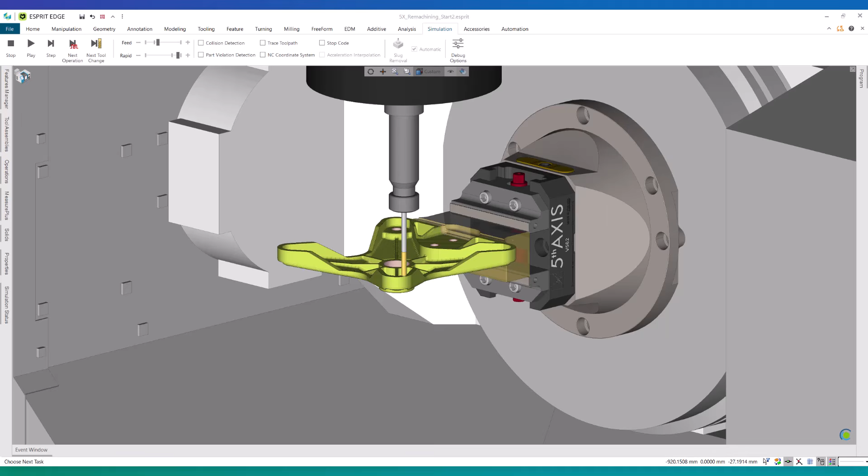Let's take a look. The bulk of the machining is already complete, and all the features are set up, including the freeform features we'll use for remachining. Freeform features let ESPRIT work directly from surface geometry, which is ideal for blended organic shapes like the ones found in this example. We'll start by selecting our 9 freeform features.

The green fillets represent the areas we want to cut, and the red surfaces are set as check geometry. These check surfaces make sure the toolpath avoids those regions as we focus only on the fillet blend. With the 9 freeform features selected, I'll launch the 5-axis remachining cycle. I'm starting by resetting the operation with default all, so we're working from a clean baseline, especially since we'll be comparing multiple pass shape strategies later on.

In the General tab, I'll name this operation 5-axis remachining for fillet, central pass offset, and select our B6, the 6mm ball end mill designed for these finishing passes. I'll enter the feeds and speeds for this tool, and that completes the general setup.

With the general setup finished, we'll head to the Toolpath tab. Here, we'll apply the central pass offset pattern to generate our baseline toolpath. It gives us a clear reference so the improvements from the newer flow and parallel strategies are easier to see later.

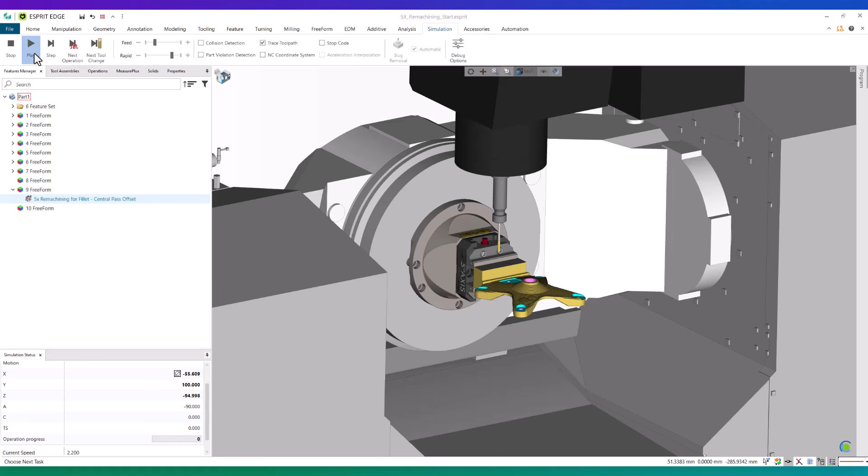As the tool moves through the fillet transitions, you can see why this happens. The constant offset approach works cleanly only when the fillet width and curvature are fairly uniform. But in this model, the width of the feature changes and the surface transitions aren't consistent. That forces the algorithm to restart the passes in a few locations, which creates those gaps and direction changes we're seeing.

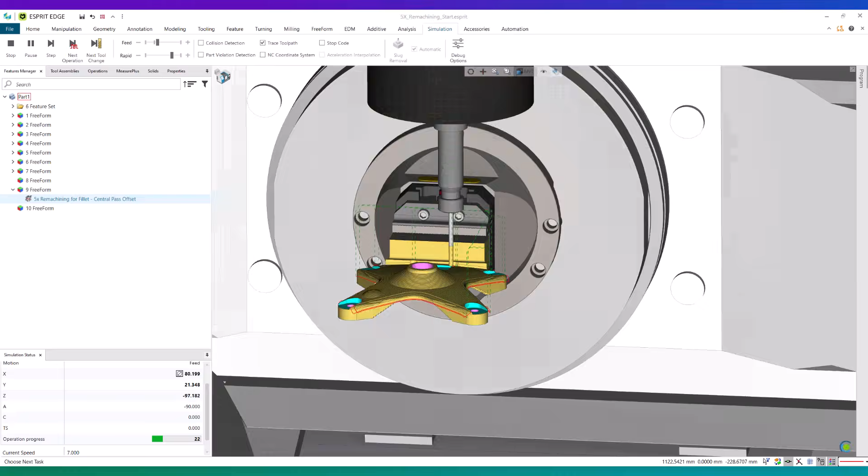This gives us a solid baseline. Central pass offset is predictable, but it also exposes its limitations when the geometry becomes more complex or the fillet tapers. In the next section, we're going to replace this with the flow passes shape. Flow takes a completely different approach. Rather than offsetting from a center line, it morphs the passes between the boundaries of the feature. That allows the step over to adjust naturally to the changing geometry. In most cases, it produces a much smoother, uninterrupted path.

So now that we've seen the behavior of the traditional offset strategy, let's move on and apply flow to the same freeform feature. I'll start by selecting the same 9 freeform feature and reopening the 5-axis remachining cycle. ESPRIT retains the previous settings, and that's exactly what we want here. By keeping every parameter identical, we can make a clean, controlled comparison between central pass offset and flow without any influence from tool selection, feed, speeds, or orientation strategy.

In the General tab, I'll rename this operation 5-axis remachining for fillet flow. Nothing else changes here. Same tool, same freeform feature, same setup. So the only variable in this comparison will be the passes shape itself. Next, I'll move into the Toolpath tab. Under the Continuity section, I'll switch the passes shape from Central Pass Offset to Flow. This is the only adjustment we're making.

Flow uses a completely different logic. Instead of offsetting from a center line, it morphs the passes between the boundaries of the feature. This allows the step over to adapt naturally to changes in the fillet width and curvature, giving the toolpath more freedom to follow the geometry instead of forcing the geometry to match a fixed offset rule. With that one parameter updated, I'll go ahead and generate the toolpath.

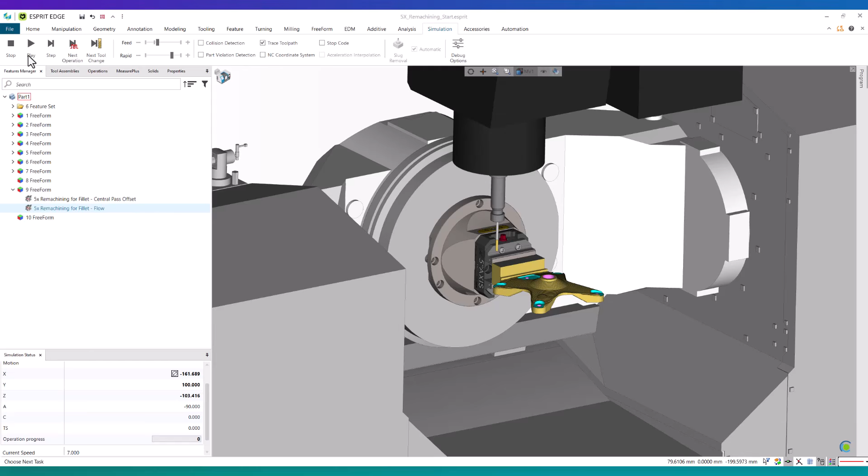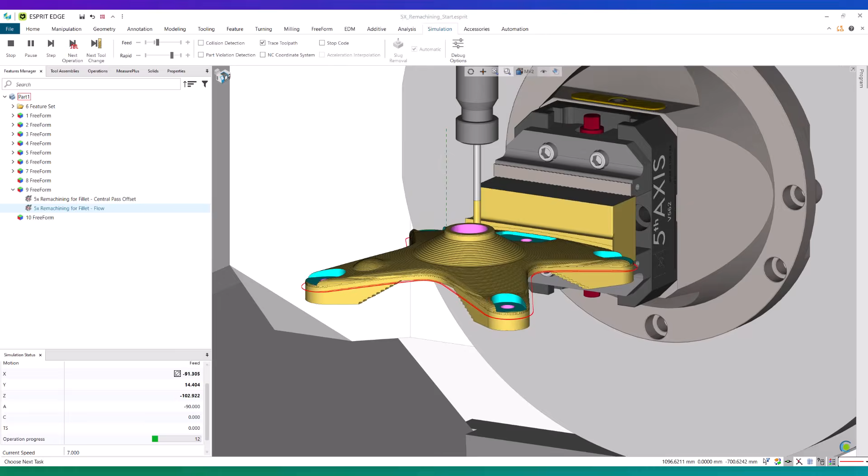As the cutter moves through the blend, notice how the toolpath aligns with the true behavior of the surface, not just at the center, but across the entire width of the feature. The morphing step over distribution means the tool stays in contact more consistently, which leads to cleaner finishes and fewer visual artifacts on the part. This is where Flow pulls ahead of the older offset-based strategies. It handles tapered blends, variable radii, and non-uniform transitions without breaking the path.

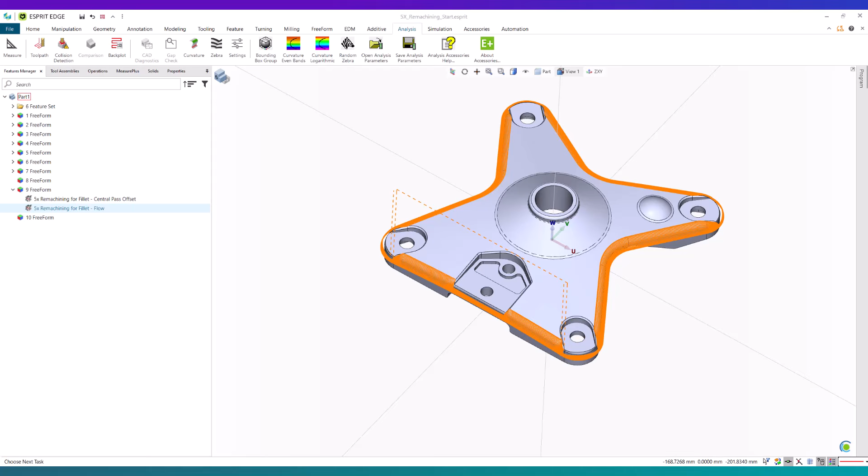On components where you're trying to avoid witness lines or maintain uniform micro finish, this kind of continuous motion is exactly what you want. So with the flow pass shape applied and compared directly against central pass offset, we now have a clear picture of how each strategy behaves. In the next section, we'll move into a different scenario, introducing a steep and shallow split and applying the new parallel strategy in steep regions while continuing to use flow in the shallow areas.

Before we move into the steep and shallow example, I want to add one more comparison. We've now seen central pass offset and flow inside the 5-axis remachining cycle, but ESPRIT also offers a 3-axis global finishing strategy that's commonly used on shallow blends. It's a good reference point because its behavior highlights the limitations of a fixed work plane compared to a full 5-axis approach. So let's take a look at that using a different feature.

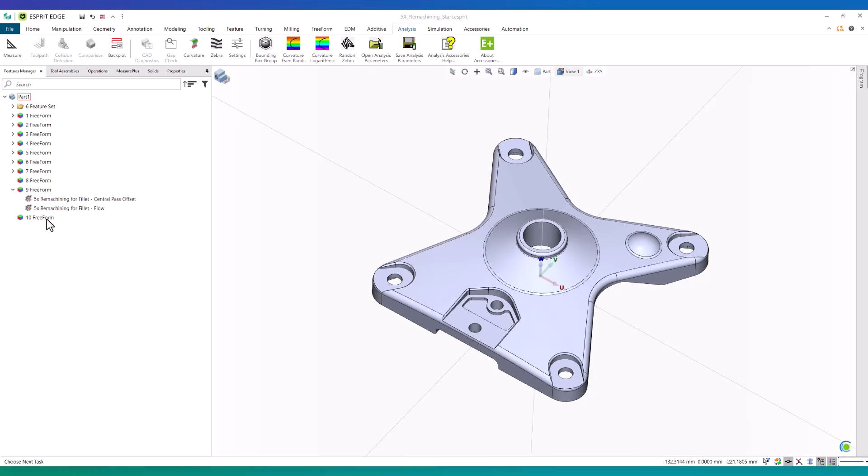I'll select the 10 freeform feature and the target geometry is shown in green. This feature includes a mix of faces, radii, and some fillets, all the areas we want to finish in this comparison. The surrounding surfaces are defined as check geometry in red, which keeps the cycle restricted to the selected regions. This definition is applied consistently across both the top side and the underside of the part. The green areas are our active machining targets, and the red surfaces are protected.

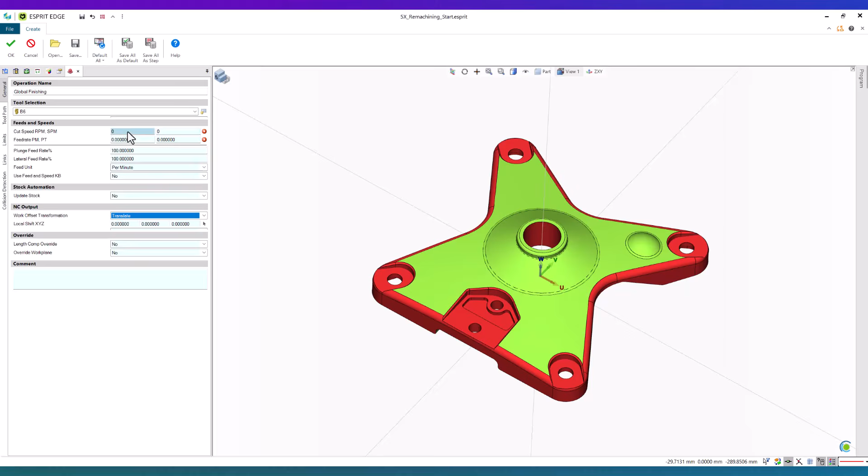With 10 freeform selected, I'll choose the global finishing strategy from the freeform operations. In the General tab, I'll name the operation Global Finishing. Select the same B6 6mm ball end mill and apply the same feeds and speeds used earlier so that our comparison stays consistent. In the Toolpath tab, I'll set the slope angle threshold to 30 degrees to define the steep versus shallow split. Increase the incremental depth to 1.2 millimeters and set the step over for the shallow region to 1 millimeter. All limits, linking, and collision settings remain at their default values.

With those parameters set, I'll generate the toolpath. Once the toolpath appears, Global Finishing produces a clean, shallow area pattern on the top side of the part. But on the bottom side of the feature, there's no toolpath generated. That's expected. Global Finishing is a 3-axis strategy.

It machines strictly from the orientation of the assigned work plane and doesn't automatically reorient the tool for geometry on the opposite side. This gives us a useful reference point. Global finishing works well for shallow regions, but only from a single direction. In the next section, we'll return to 5-axis remachining and apply flow specifically to the shallow areas so we can directly compare the two finishing approaches.

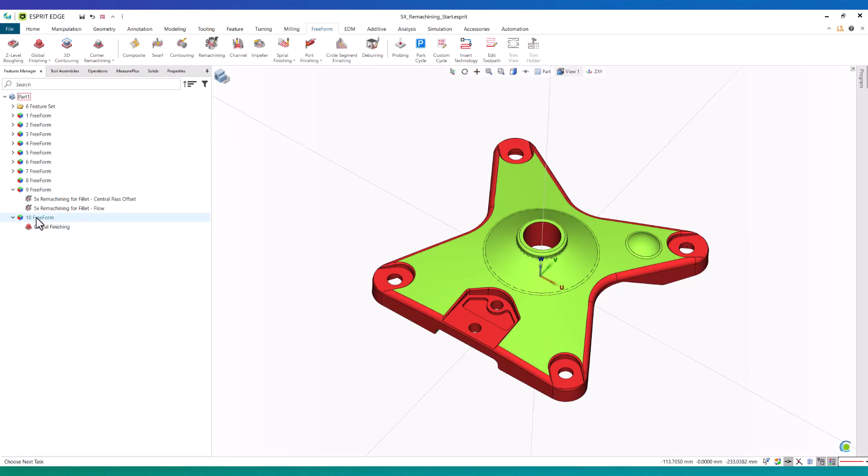With the 10 freeform feature highlighted, we'll move back to the freeform 5-axis toolpath and select the remachining cycle. We'll reuse the same General tab inputs as before to keep this comparison consistent, and then head straight to the Toolpath tab. In the remachining section, I'll change the machining type to steep and shallow areas.

I'll set the slope angle threshold to 30 degrees, then update the steep path step over to 1.2 millimeters. The shallow area strategy will remain set to flow and its step over stays as is. This combination gives us flow-based morphing passes in the shallow regions and a different approach in the steep areas.

Next, I'll move into the Orientation tab. Under the Orientation Strategy work plane list, I'll add both the ZXY plane and the bottom plane. These two indexed orientations give the system the flexibility to machine both sides of the feature without interruption.

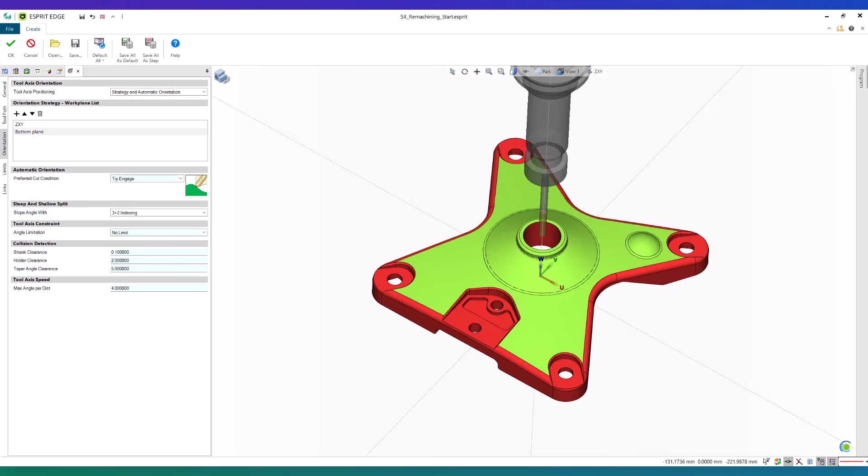Still in this tab, under Steep and Shallow Split, I'll change the slope angle from Feature Work Plane to 3+2 indexing. This forces the steep versus shallow evaluation to follow the two work planes we just defined, giving us a consistent and predictable split across the entire feature. There's nothing else we need to change, so I'll press OK to generate the toolpath.

Once the toolpath appears, you can see the result immediately. The system applies flow across the shallow regions and the new path shape in the steep corners. And thanks to the dual work planes, the cycle machines both the top and the underside of the feature. This gives us a full, multi-directional finishing strategy that goes beyond what the 3-axis global finishing cycle can achieve.

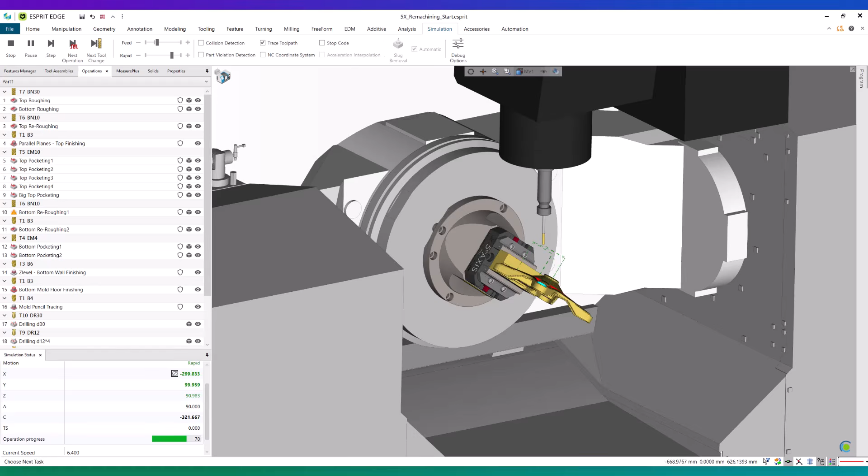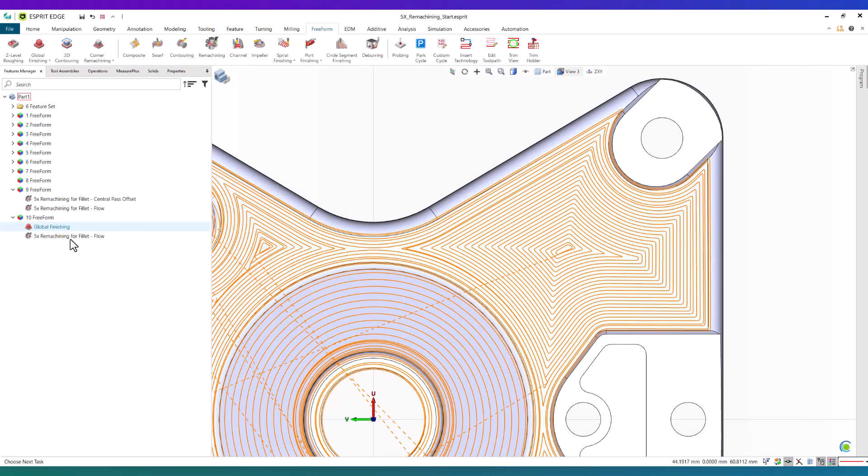That's a natural limitation of a constant offset strategy. The toolpath doesn't adapt as the geometry widens or narrows, so the surface can pick up those directional shifts. Comparing that to the 5-axis remachining cycle with flow, the difference in path shape is immediately recognizable. Instead of uniform offsets, flow distributes the passes with a variable step over and gradually morphs between the inner and outer contours of the shallow area.

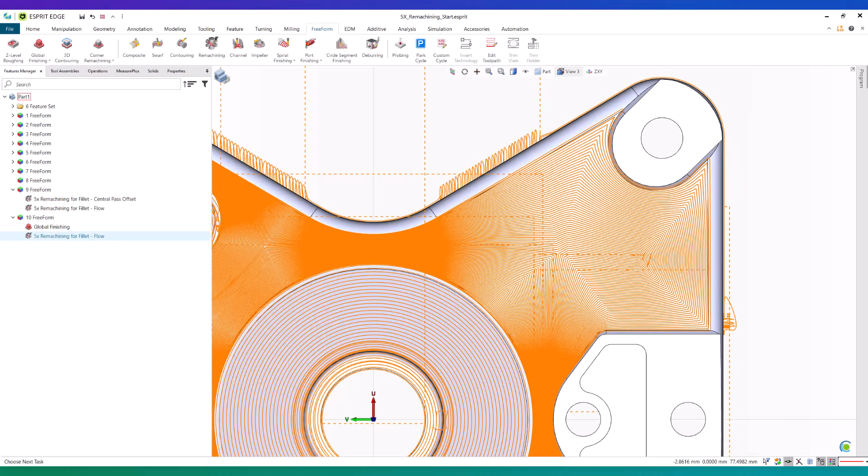This produces a much smoother transition across the blend and minimizes those witness lines that we saw in the concentric pattern. Even though the 5-axis toolpath is longer, the surface result is noticeably cleaner because the passes follow the natural behavior of the geometry. The gradual, uniform variation in flow's distribution reduces abrupt directional changes and creates a more consistent finish, especially around the corners and tapered areas where the constant offset approach struggles.

Looking at the back side of the part, you can clearly see the contrast between the two strategies at work. In the steep regions, the cycle switches to a Z-level approach, creating clean, consistent, vertical slices wherever the surface exceeds the slope threshold. In the shallow areas around those features, the flow pattern takes over, morphing smoothly between the boundaries and maintaining uniform engagement across the surface.

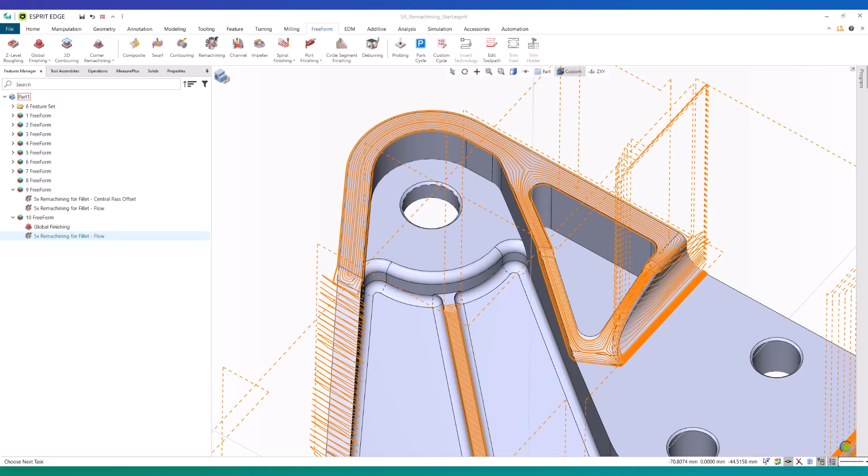What makes this so effective is how naturally the toolpath transitions between the two behaviors. Z-level gives you the stability and predictability needed for steep walls, while flow adapts to the broader, blended surfaces without interruption. Together, they show the flexibility of the 5-axis remachining cycle, automatically choosing the right strategy for each region and delivering full coverage on geometry that would otherwise require multiple separate operations.

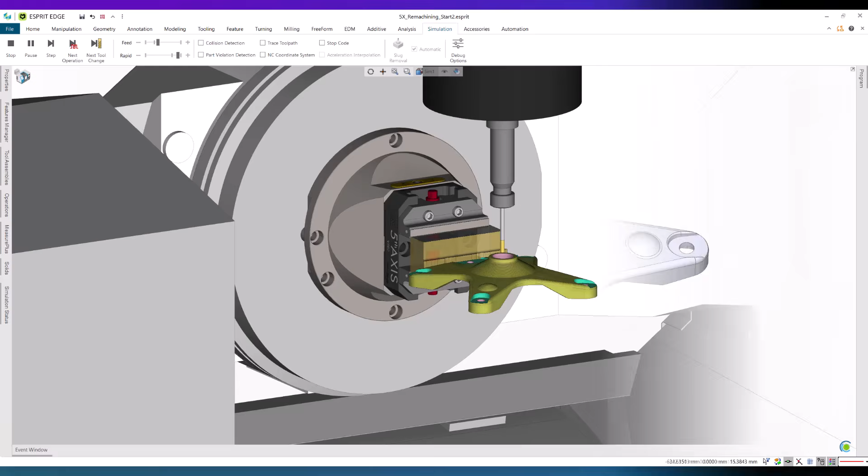That brings the full workflow together. Across the different examples, we've seen how the remachining cycle adapts to a wide range of geometry, from traditional offset strategies to flow for continuous shallow finishing, and the combined steep-shallow approach using both Z-level and flow where each is most effective. What stands out is the consistency in how these patterns respond to the shape of the part.

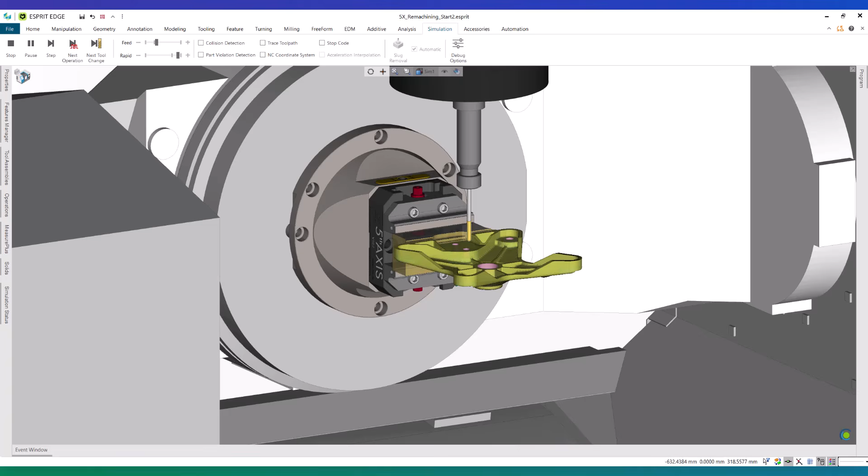The system automatically recognizes steep areas, identifies blended or variable width regions, and applies the appropriate strategies without any extra boundaries or manual intervention. Whether it's maintaining engagement in steep corners or morphing passes smoothly across broad surfaces, the toolpath stays connected to the topology and delivers a predictable, uniform finish.